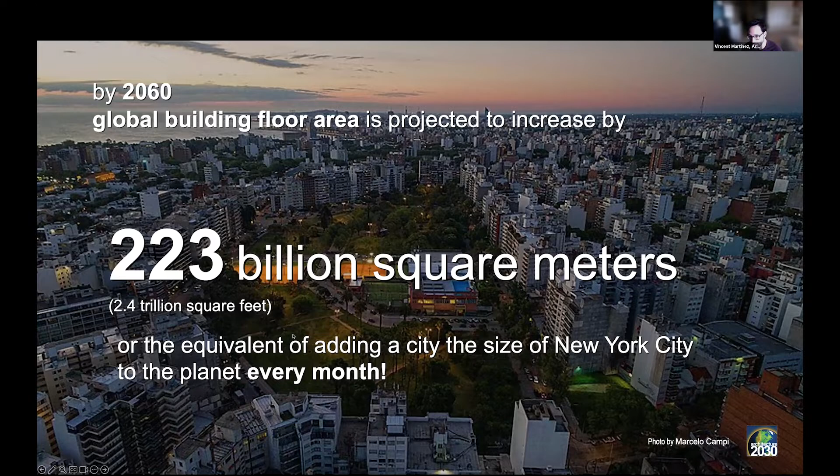I was just at a global forum in Paris, and the conversation there was about a city of Paris a week, the nation of Japan every year. So it is quite a dramatic amount of building stock that is projected to house all of these folks. This includes schools, housing, offices—everything. Now the global building stock currently is about 2.4 trillion square feet, so we're essentially adding another entire planet, everything we built since the dawn of the Industrial Revolution, in the next 4 decades.

Now in terms of the infrastructure associated with those buildings, the UN Environment Program notes that in 2050, 3/4 of the infrastructure we're projected to have has yet to be built. So when we're talking about doubling the building stock, we're essentially talking about close to quadrupling the infrastructure. Infrastructure here means a variety of things—anything from bridges and roads and rails to communications and telecom. It's a larger category, but it gives you a sense of the scale of these global projections for accommodating a growing population.

Now, we know that the built environment is responsible for about 42% of global CO2 emissions. These are energy and process-related emissions, so they don't include things like deforestation or agriculture, but anything that comes out of energy sources. We can see here that about 27% of that is building operations. You all operate facilities—you're familiar with heating, lighting, cooling, hot water, plug loads in those facilities. That's building operations, and this is annually. All of the buildings currently around today emit about that much emissions every year.

If we also look at just four materials, cement and iron and steel, I call those one, but we can call them two, and aluminum, they're responsible for another 15% of global emissions as they're used in the built environment. There's a bit more steel used in transportation and other areas, but about half of the steel and concrete is used in buildings. You're familiar with that for your facilities, but about half of the iron, steel, and cement is also used in infrastructure—roads, rails, bridges that we use to get around and move from building to building, including infrastructure projects. So it's a pretty significant piece.

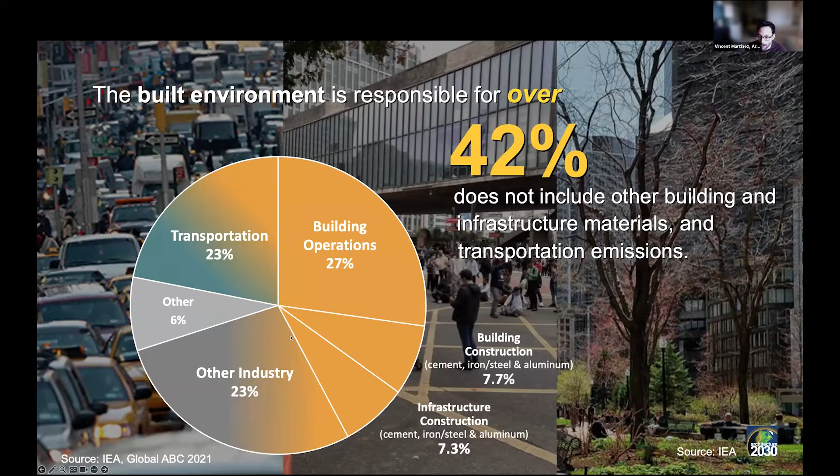We also know this doesn't include all the other building and infrastructure materials that are used. We're not talking about the plastics in our buildings, or asphalt in our infrastructure. We also know that the built environment—the way we plan and design our cities—influences how folks get around, that transportation emissions portion of the pie. So we recognize that the built environment's impact is actually considerably more than that 42%.

Certainly how we plan, design, and construct that built environment over the next four decades very well may determine the fate of the planet. It's a huge amount of the carbon budget that will be taken up by global infrastructure and building growth.

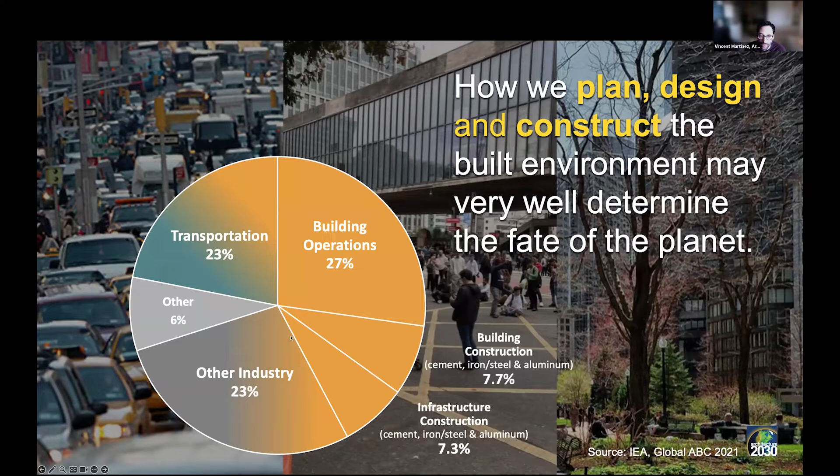So how are we supposed to get to a zero carbon built environment? Well, we think that step one is just good design, planning, and construction. We think you can get pretty far along the pathway there just through better design—low cost, no cost, and in many cases cost savings opportunities. The rest of the way, we'll need renewable, fossil fuel-free energy sources to power our buildings and infrastructure and create our materials.

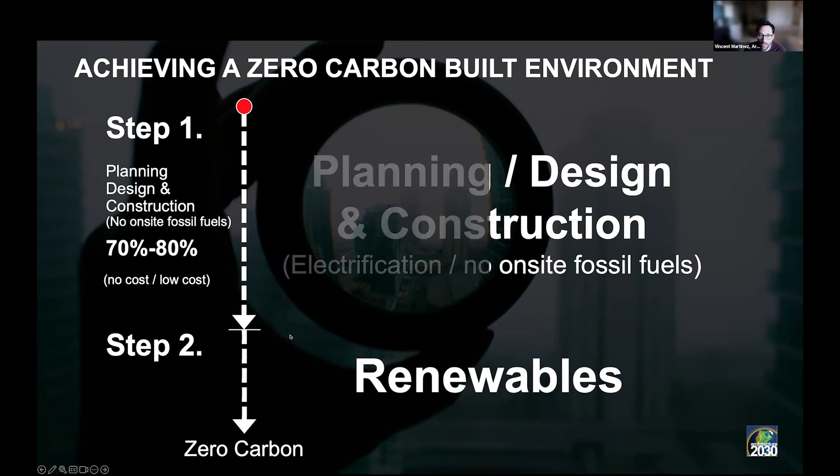So in step one, planning, design, and construction, including no on-site fossil fuels for both construction and operation—again, we think about 70 to 80%, and we've seen this in a variety of building and infrastructure projects—by just better design, including things at the planning scale like transit-oriented developments, walkable communities, carbon sequestering sites, local food production. These are great options for designing systems differently.

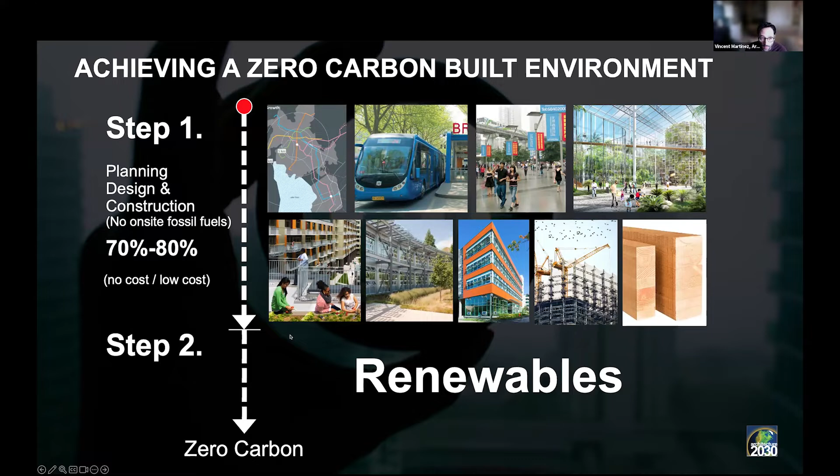And then we go down into the building-focused pieces like reusing existing buildings and renovating them, the orientation and shape of the building, the color, passive heating and cooling strategies, daylighting and natural ventilation systems, and then all the way to bio-based materials and carbon sequestering structures.

We have a good understanding of the technologies, systems, and design processes that can get us quite a bit of the way there. And again, these are low cost, no cost, and cost savings options. Then you have the renewables, which we're seeing a proliferation of, including wind, solar, geothermal, tidal energy—just a proliferation of renewable energy sources. It's growing almost exponentially every couple of years, so it's really incredible to see that progress. But first, we need to get the energy consumption down using design and planning strategies.

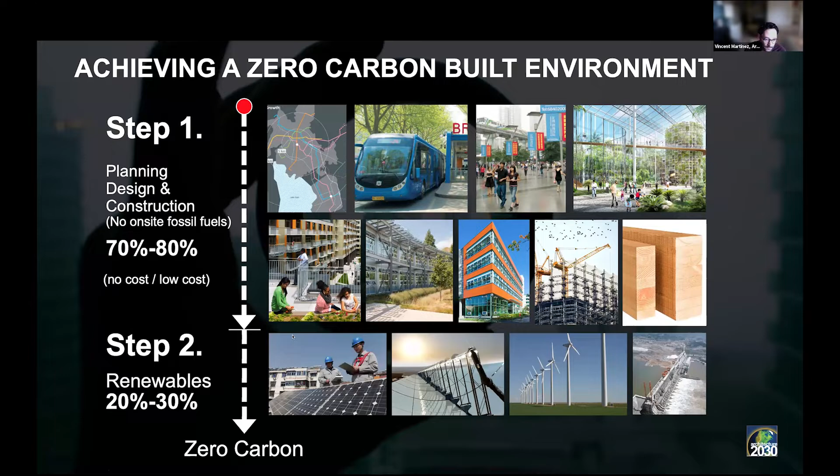Now, we've recognized that these strategies are going to look different all over the world. We actually embarked on a project about a decade ago called the 2030 Palette that recognized a lot of these strategies around regional issues, city and town planning, district strategies, as well as sustainable sites, all the way down to laying out buildings, building strategies, sourcing and selecting building materials for construction and infrastructure. What we tried to focus on here are the principles—what are the strategies around natural ventilation, around solar shading—and then how are they being applied in different local vernaculars with local materials all over the world?

We have a history in the modern movement that started in the 1920s in Europe, denoted the international style. That's why we have buildings that look the same all over the world today, these glass boxes that can be placed anywhere. We recognize that the future is really looking back at the past, at a lot of the ways that we designed and understood how we lived with nature and with the environment, and then found local materials that were inherently lower carbon in their manufacturing and construction. These are opportunities to learn from those principles.

So I'm going to dive into what we can do around broader principles now that are being agreed upon at an international level. I mentioned I was in Paris last week for a global forum on buildings and climate, and the French government and the United Nations Environment Program launched a set of principles. They're not exactly the ones I'll show here, but they were very similar in alignment about this new paradigm shift for a postmodern movement of planning and design of buildings and infrastructure.

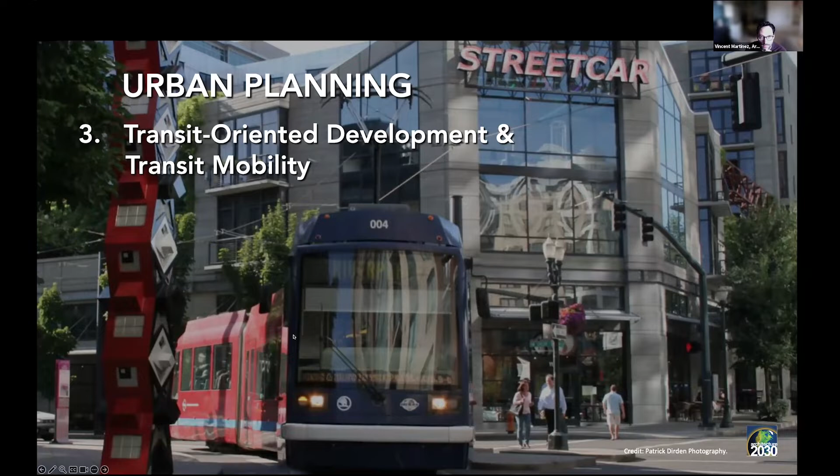Third urban planning principle is planning for transit-oriented developments. This is to align with density, locate residential, commercial, and recreational areas near transit hubs. We need to ensure free and efficient circulation, but we don't need to be tied specifically to vehicles and roads. There's a variety of mobility options that come at different forms and scales, and transit-oriented developments help support those.

Fourth urban planning principle is creating inclusive mixed-use neighborhoods that combine residences, workplaces, and civic services. Sometimes this is called the 15-minute city, where all services are available within a 15-minute walking distance, paired with transit-oriented developments. We know a lot of our transportation issues and emissions are associated with single-use development—you go from a residential neighborhood to a commercial neighborhood, and we have the traffic and emissions associated with that. So creating these mixed-use, vibrant neighborhoods is a critical strategy for reducing transportation emissions, but it also promotes health and culture in communities.

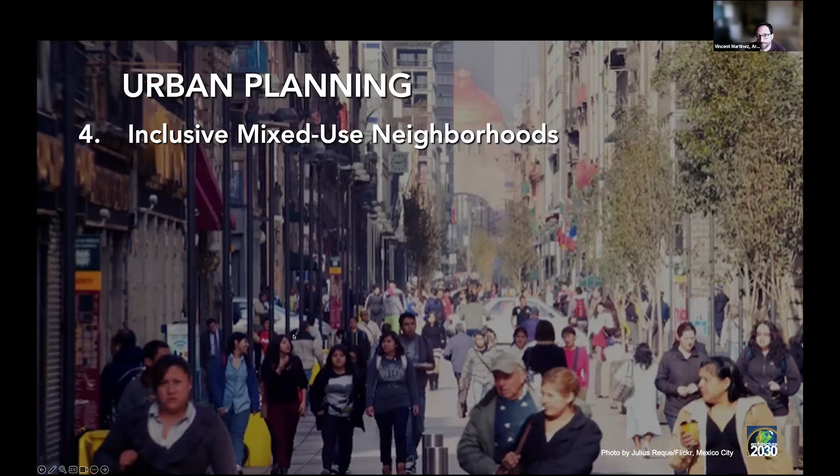And then finally, the fifth urban planning principle is planning for small blocks, human scale streets, walking, and biking. Again, we need to consider the human scale—we're building cities for humans. How do we design these cities and streets for people and not the automobile?

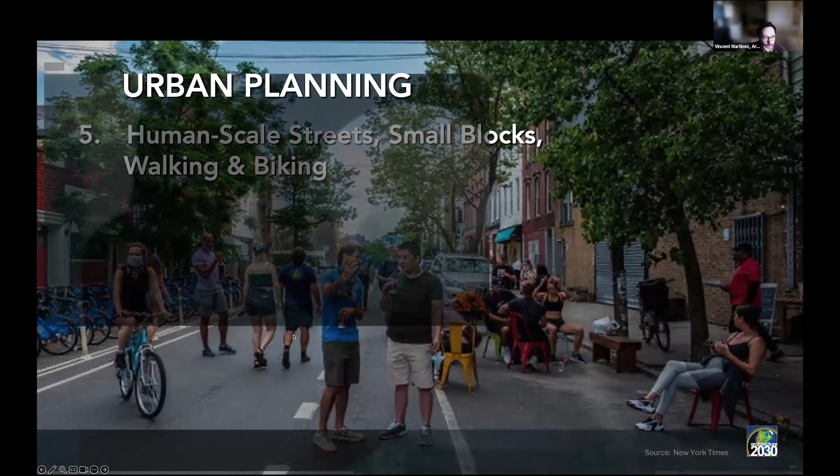So I'm going to go over those urban planning principles again: growth boundaries and compact resilient developments, natural environments and open parklands, transit-oriented developments and transit mobility, inclusive mixed-use neighborhoods, and human scale streets, blocks, and walking and biking. We think that together, all of these principles can really reduce emissions, and can create more vibrant neighborhoods, promote culture, and increase livelihoods and health.

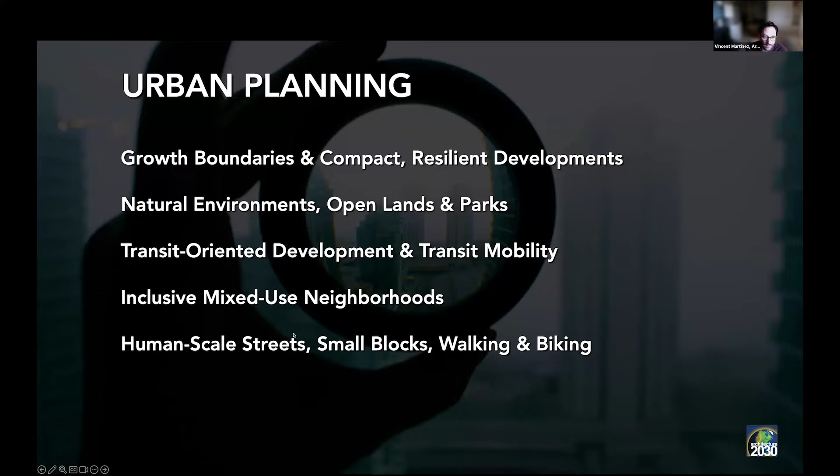Now let's look at the planning, architecture and design principles. There are also 5 here—we'll talk about this a bit towards the end around the revised building and energy framework for the Climate Toolkit, particularly around electrifying and incorporating passive solar heating, cooling, daylighting, and natural ventilation, and then integrating on-site and off-site renewable energy, all while using no fossil fuels on-site. We know we need to zero out building operations, and we need to start with passive systems.

The second architecture and design principle is reuse, adaptation, renovation, and restoring buildings instead of constructing new ones. There's a great quote by one of our senior fellows: the greenest building is the one that is already built. A recognition of this has come in the US particularly, where half of architectural projects now are for existing buildings—we're actually looking at doing more renovations than building new projects now, which is really exciting from a climate perspective, but also a community one. This is both an embodied carbon strategy, saving on materials by renovating instead of building new, and an operational emissions reduction opportunity by improving efficiency and decarbonizing existing buildings.

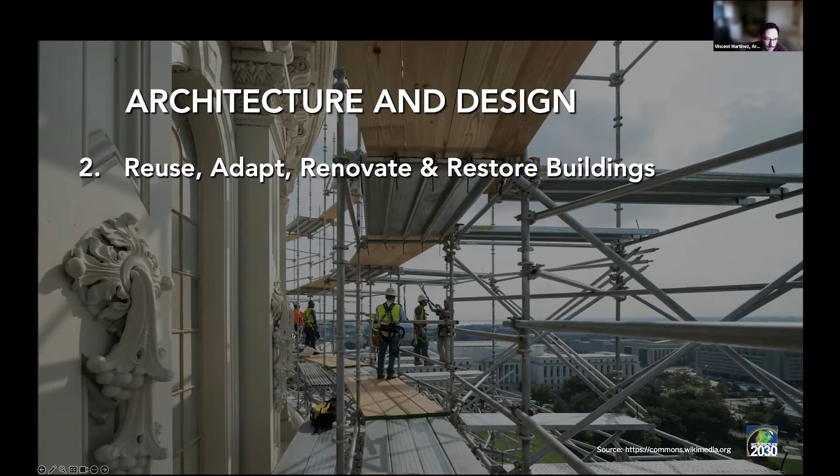But their benefits are much more beyond emissions. Building reuse also supports revitalizing existing neighborhoods, creates local jobs, builds financial equity, increases neighborhood resilience, and empowers communities. We know that, particularly in the United States, investment in communities has been subjected to historic discrimination. There's potential here for sustainable and equitable climate solutions that have meaningful economic outcomes for those most impacted in our communities, because these are inherently local—you're not importing or exporting jobs across the world when you're renovating buildings in your own town.

The third architecture and design principle is creating carbon sequestering landscapes and infrastructures, essentially paving less and planting more. This is a really impactful strategy because these solutions have been underutilized but provide a ton of benefit. Landscape architecture has long embraced many of these solutions, but they're now gaining wider recognition among architecture and engineering organizations. Some folks call this rewilding in cities.

According to the Nature Conservancy, these ecological interventions can provide up to 37% of the cost-effective carbon drawdown needed by 2030. So nature-based solutions in the built environment support not just climate mitigation, but enable co-benefits like human and environmental health, economic prosperity, and biodiversity, of which we're also in a biodiversity crisis in the world.

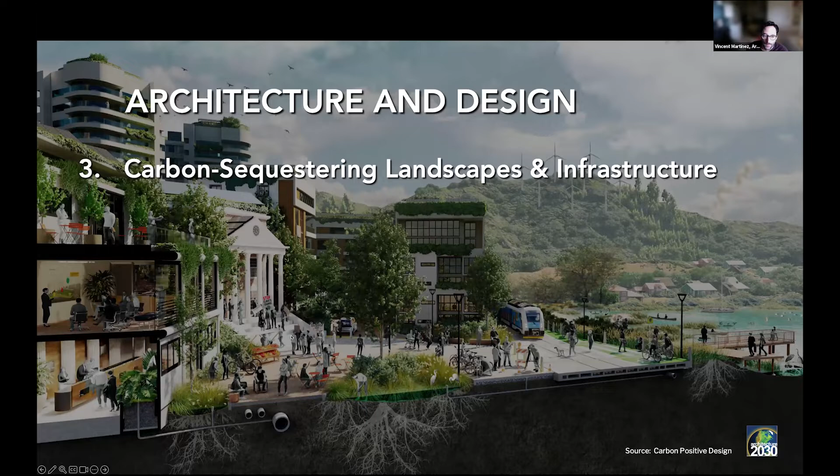The fourth architecture and design principle is designing buildings for disassembly, so we can reuse most of their materials and optimize the structure and use locally sourced nature-based materials. We talked briefly about reusing existing buildings, and that's first and foremost - essentially reusing cities, reusing buildings, and now reusing materials. Part of that is making sure we're designing things to come apart and be reused.

We see this as a movement not just in the built environment but in many other spaces, because materials are precious and we need to stop having a use and waste mentality and bring it back into the life cycle in a circular economy approach. Bio-based materials also provide an opportunity to store carbon in our existing built environment.

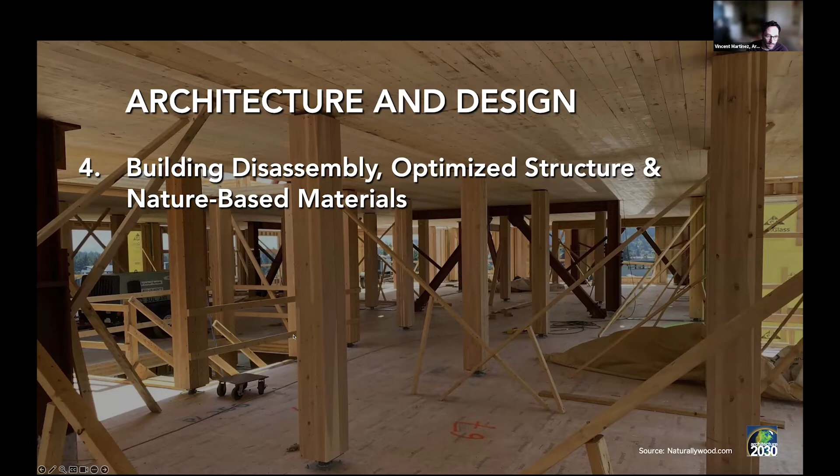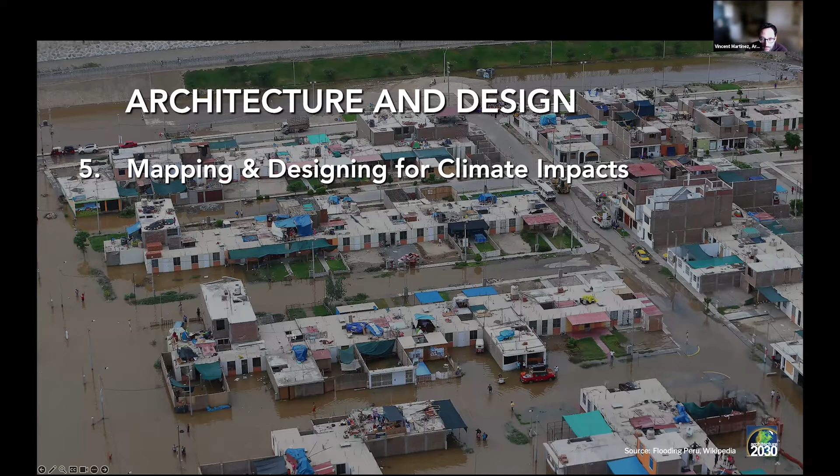Finally, the fifth architecture and design principle is mapping the present and future climate impacts and designing to mitigate their impacts. We know we're already experiencing dramatic climate impacts. They're already here, and we need to anticipate them, map them, and design for them. We can't be thinking about the current state of the climate - we have to think about the future state, and design for resilience for flooding, drought, sea level rise, heat waves, and more.

So I'm going to go through those architecture and design principles one more time. First, electrify buildings, apply passive systems, and apply renewable energy. Reuse, adapt, renovate, and restore buildings. Carbon sequestering landscapes and infrastructure. Building disassembly, optimize the structure and nature-based materials. And finally, map and design for climate impacts.

I'm going to highlight back to those projections about essentially doubling the global building stock in the next four decades, quadrupling the infrastructure. I want to stress that these statistics are extremely intimidating, and they are just projections. If we reuse a lot of our buildings and infrastructure, we can start to reduce some of this. But we do have growing populations all over the world that will need adequate housing, spaces to live, work, and play.

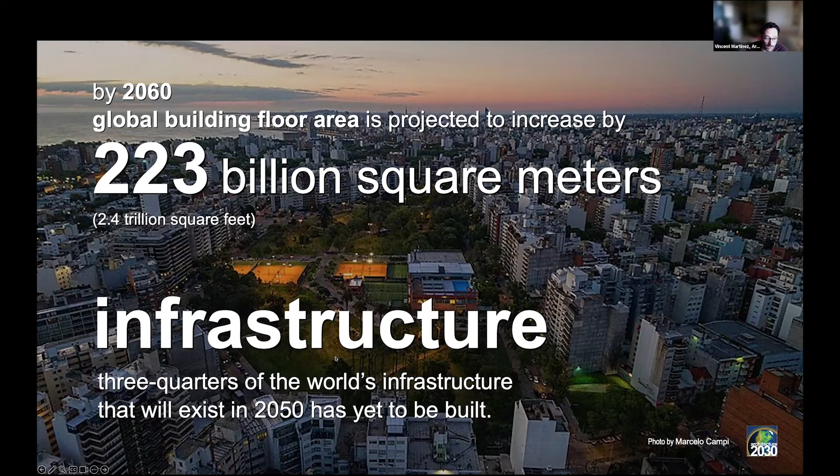I'd like to stress that much of this has already been captured. We know what this looks like. We have pockets of the future that are alive and thriving in the present. We just need to spread these principles far and wide, let them take root in local communities, and that they should have place-based, local vernacular, culturally appropriate applications.

This is not a new international style from the modern movement, the way we transformed the built environment over the last 100 years. But this is an opportunity to really reinvent a sustainable future and meet the urgent challenges of our time.

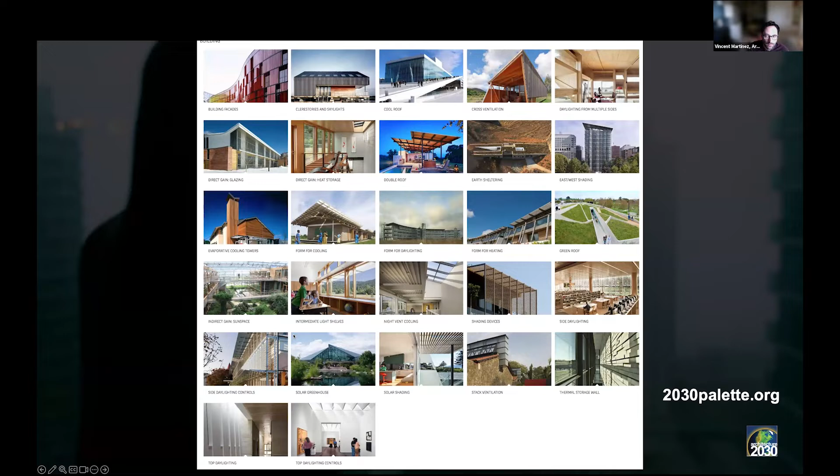So I'd like to just end - I was asked to go over some of the revised Climate Toolkit actions for buildings and energy that we help to support and better understanding this. I'll say that these actually align very well with a recent initiative from the White House in the US on a zero emissions building definition. They call it phase 1 because they're really just looking at building operations, but they will continue to expand and talk about embodied carbon of those emissions associated with materials development, extraction, production, and use, as well as construction emissions. So that's coming up.

There's actually a meeting in DC in a couple weeks, but this is on the operation side, so it aligns very well. This is from the Climate Toolkit. First off is meeting your nation's Paris Agreement targets for CO2 emission reduction. We see that each country that signed on the Paris Agreement has their own nationally determined contributions, including buildings as part of their NDCs. This is an important framework to make sure you're meeting that country's target. We mentioned this in the principles, but making sure we derive power solely from 100% clean renewable energy.

That can be generated either on site of your facilities, on the building, or on the parking lots or in the campuses, or it can be procured through market mechanisms. There's a pretty robust market mechanism approach for procurement of renewable energy that ensures we have a variety of things to make sure we have additionality and longevity of our renewable energy stock.

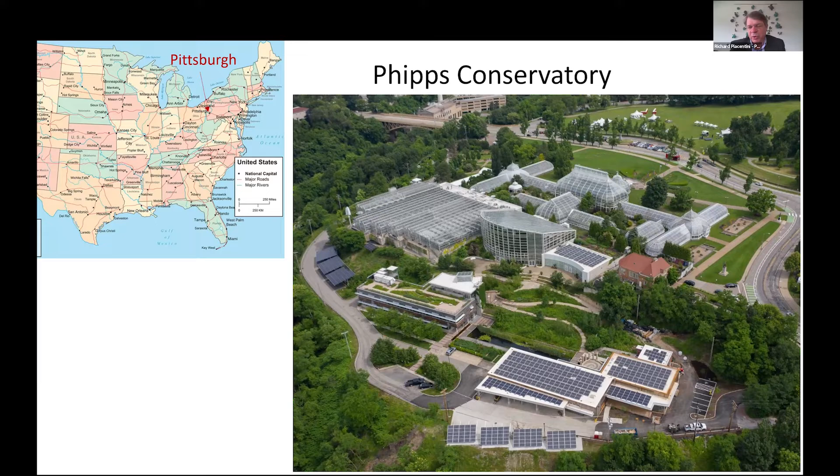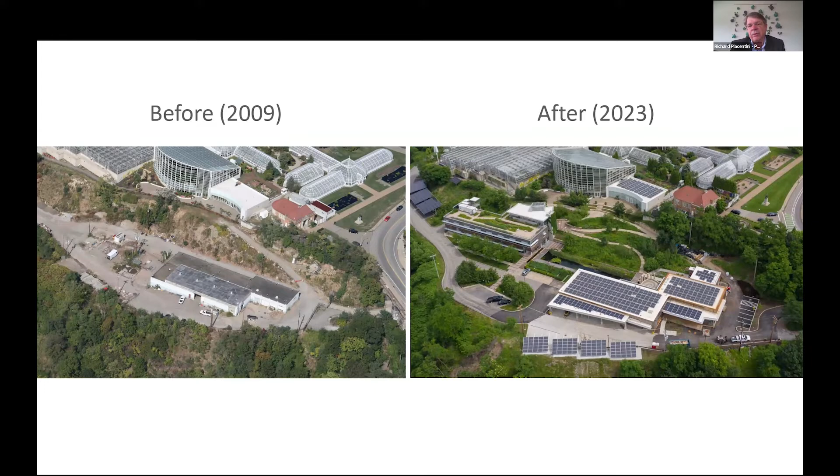So a lot of experience that we gained in developing this building about how do you really create something that's good for people and good for the planet. And a lot of times people will ask me, well, how did you justify the cost for that? For example, how did you justify the cost of building a zero energy building? And they'll ask me how much, what the payback period was.

I honestly have to tell them I don't know, because that was never really a consideration for us. We didn't take out the calculator before we decided to do this project and say, okay, should we or should we not build a zero energy building. We actually made the decision that we wanted to build a zero energy building at the outset. And then we pulled out the calculator and said, now what's the most cost-effective way to achieve zero energy. So there's a fundamental difference there about when you decide to bring costs into the equation.

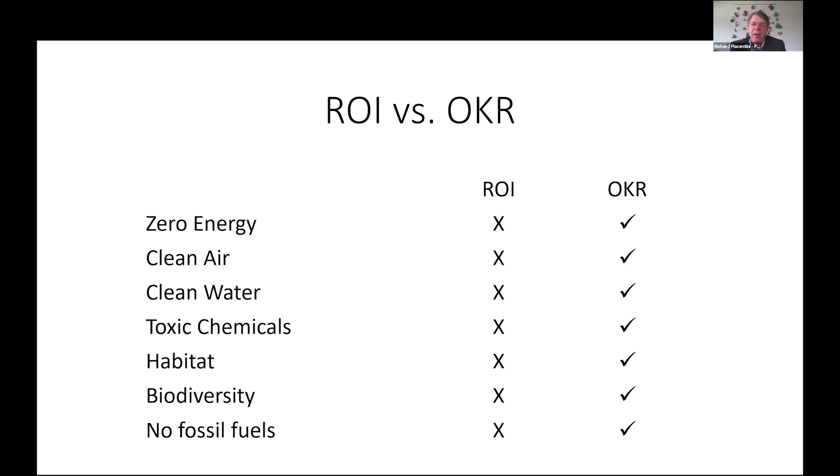Like I said, the traditional way with return on investment only looks at direct costs. OKR actually lets you look at both direct and indirect costs. That's the type of system that we use at Phipps Conservatory in trying to decide what kinds of projects that we're going to do, which allows us to achieve many of the things that we value in our way of thinking.

Another really important consideration is taking the long-term view. Particularly when we use return on investment as our measure of success, we are very much focused on trying to get our payback as quickly as possible, and it really leads to short-term thinking that makes you focus on first costs and try to figure out how can you get your money back as quickly as possible. But I think it's really important for us to start shifting the way we think about what are the costs and benefits over the long term.

I think when you start to look at it from over the long term, you see that that's where the greatest value lies in developing a project.

There was a study done by the Packard Foundation back in 2002, where they decided to look at the cost differences between market rate buildings and various levels of LEED buildings, as well as the Living Building Challenge building, which actually hadn't been launched at that time, but they had some of the preliminary information of what was going to be required. They wanted to understand what the difference was in the first costs, what it was going to cost to actually produce that building.

Then they wanted to look at what the actual cost was going to be over the long term. I'd like to compare the market rate building to the Living Building Challenge building. The Living Building Challenge building is the building that meets the highest standard for energy efficiency and human and environmental health. It's actually the most rigorous green building standard. It results in buildings with zero energy.

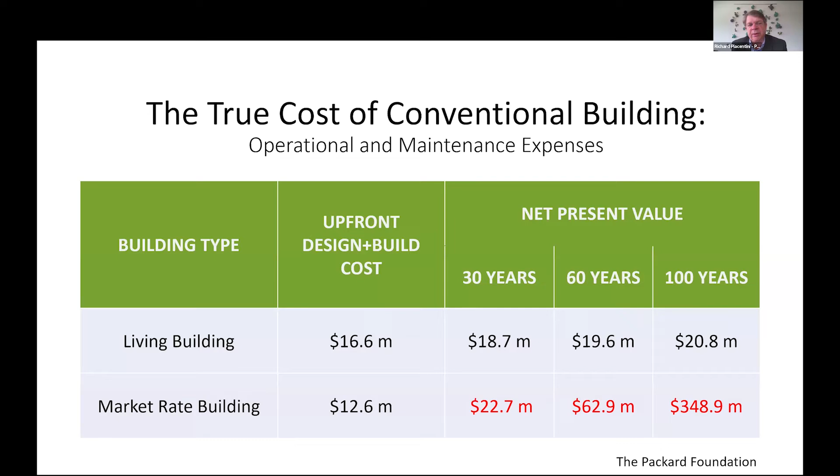And this is only looking at direct costs. It doesn't look at the fact that the living building challenge building contributes very little to pollution of water and air, and to the extraction and burning of fossil fuels, compared to a market rate building. So there are significantly greater benefits to building a living building challenge building over the long run.

Another thing to think about is that when we want to change how we measure success, we need to think about how we view the world and what lens we use. One such lens that I find really attractive is regenerative thinking, where one starts to think beyond sustainability to embrace an interconnected, dynamic view of relationships and capacity building.

I'd like to refer to some of the work done by Carol Sanford, where she talks about four different paradigms for interacting with the world. The first model she talks about is called the extractive model, or the exchange value model. This is the model that most of us in Western societies use for how we look at the world and how we operate.

We tend to see the world as fragments. We're focused on 'it's about me.' Quite often we don't think about, or maybe don't care about, who we hurt or what we hurt in the process, as long as we get ours. It's this idea that the world is full of resources—let's take what we need and not worry about what happens. That's the way most societies work these days.